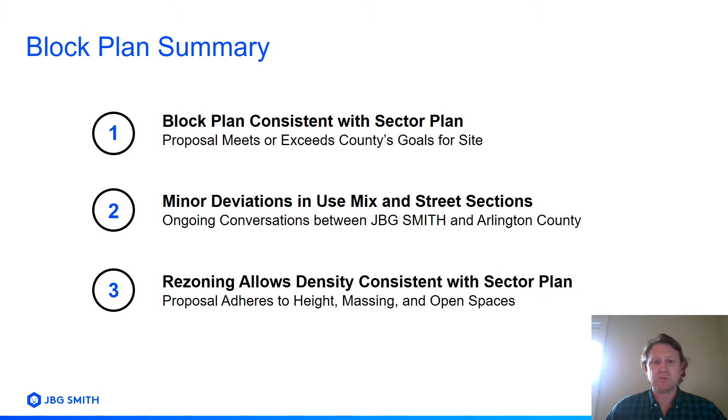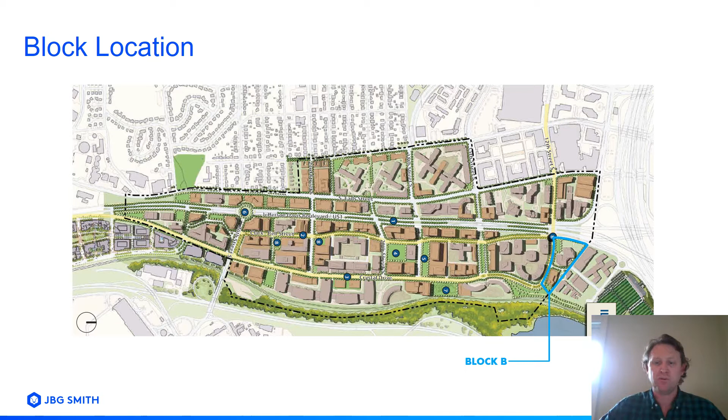For context, the subject site is located at the northern end of Crystal City and is bounded here in blue. The site is currently improved with an existing office building on the western portion, which JBG Smith also owns, and a passive green space on the eastern portion, which was indicated in the sector plan to be a potential development site.

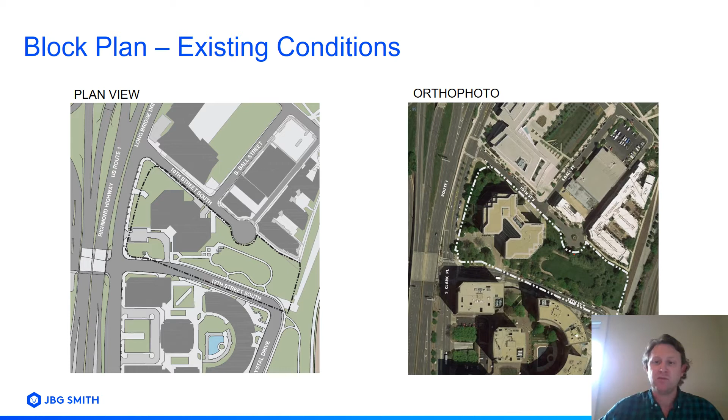This snip from the sector plan shows that the subject site, highlighted in light blue, be limited to 110 feet in building height.

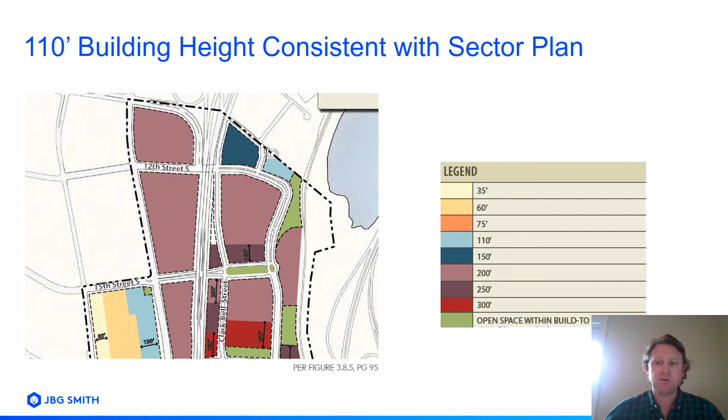This snip, also from the Crystal City sector plan, shows that the base density for the block, once rezoned to C-O Crystal City, should be 1.5 FAR.

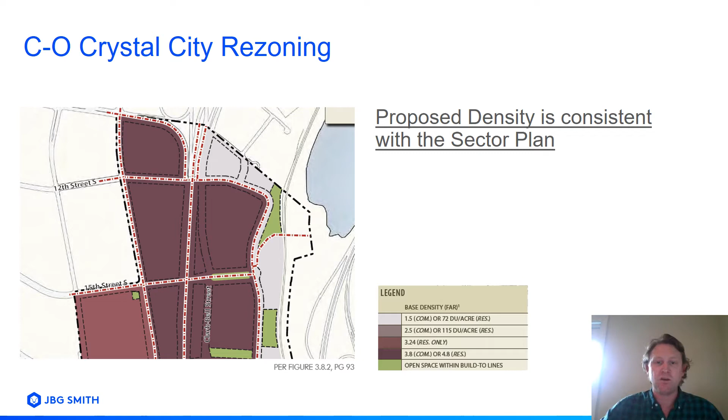The sector plan also included guidance that a potential development on the site should include an architectural feature along the eastern facade in order to mark the intersection between Long Bridge Park and Crystal Drive.

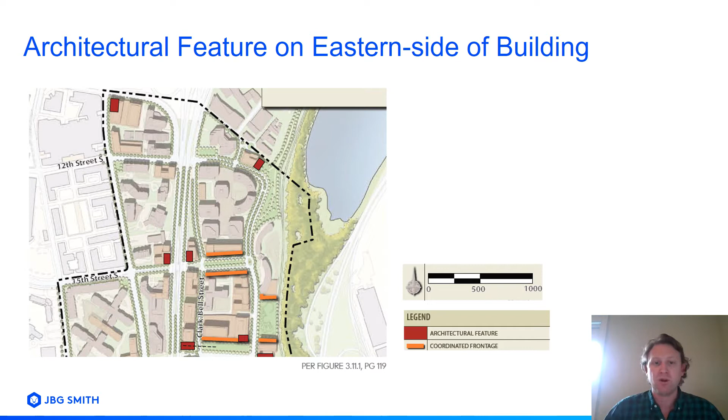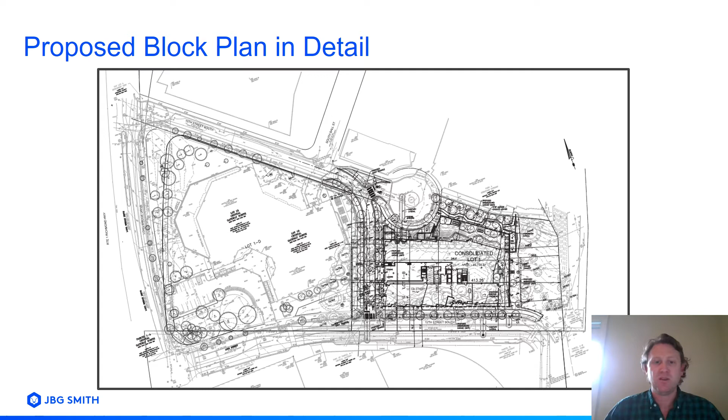This shows the detail around the proposed block plan, with the eastern portion showing the improvements from the new 101 12th Street project and the western portion showing the existing 201 12th Street office building.

In terms of density, the application includes a total GFA of 561,094 square feet, which is consistent with the PDSP for Crystal City that was approved by the County Board back in March.

As part of the PDSP, we agreed to provide a series of community benefits centered around open space dedications and infrastructure improvements, in order to achieve the bonus density required to support the application.

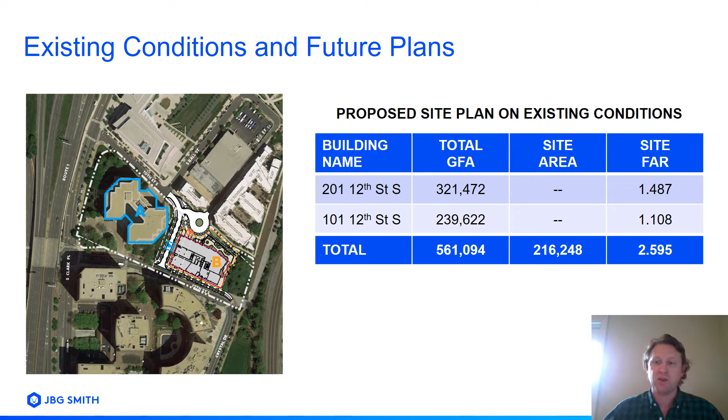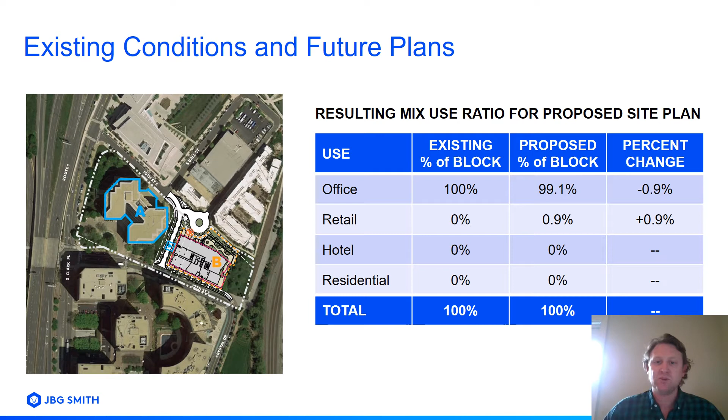This shows the resulting mix ratio from our proposed application. You can see that the site will be predominantly office, with a small amount of ground floor retail located within the new 101 12th Street project. Note that this is a deviation from the sector plan, which envisioned a balance between office and residential on the site.

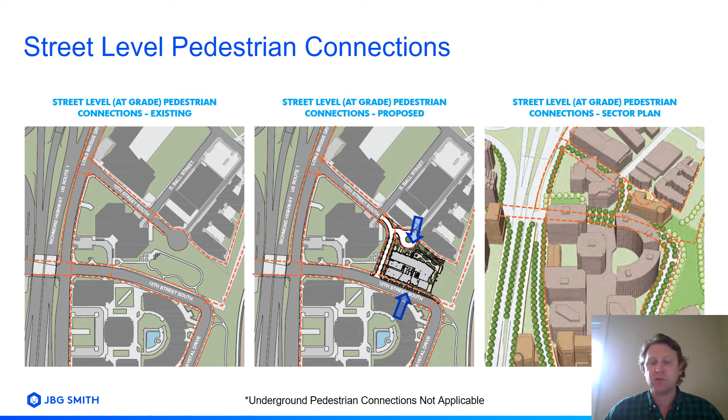In terms of street level connections, the application is consistent with guidance from the sector plan, showing a new roadway connecting 10th and 12th Street to provide enhanced pedestrian and bicycle circulation. Additionally, the project has an opportunity to create enhanced connections from the existing cul-de-sac going up towards Crystal Drive and Long Bridge Park, which we are currently exploring with county staff.

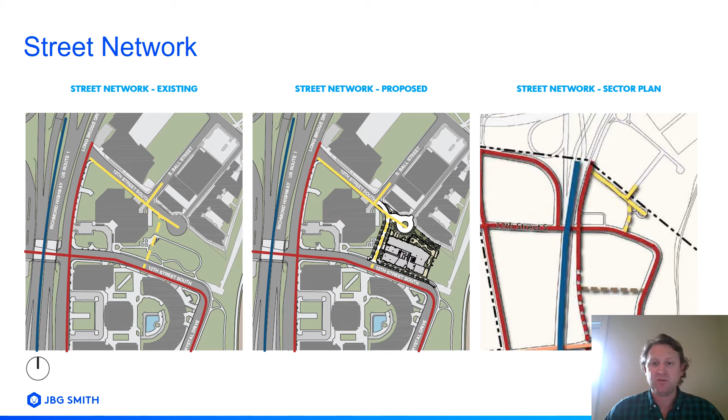As mentioned, the sector plan indicated the new roadway, or South Ball Street, be installed to connect 12th to 10th Street. This new roadway will provide redundancy to the master transportation network and increase permeability through the site for vehicles, pedestrians, and bicycles.

We very much look forward to working with staff and the community to understand how we can best come up with a cohesive design for how our improvements will coincide with the potential park programming that will be determined through a staff-led effort with the community.

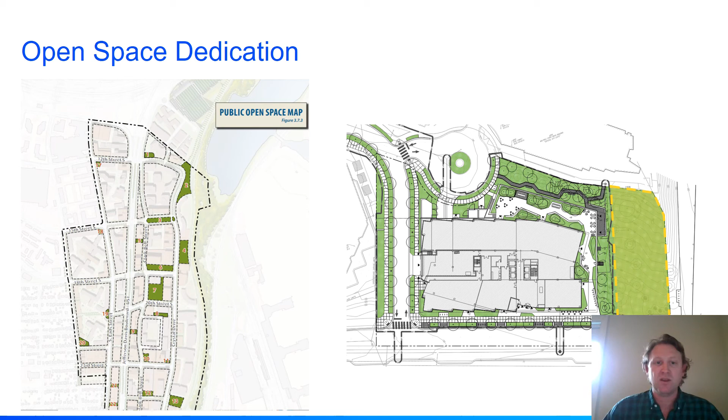In summary, the block plan is generally compliant with guidance from the sector plan when it comes to building height, density, massing, and coverage. There are a handful of minor deviations: one being the use mix, two being the street sections, and three being a parking reduction. However, I would note that none of these are inconsistent with other applications that have been recently approved.

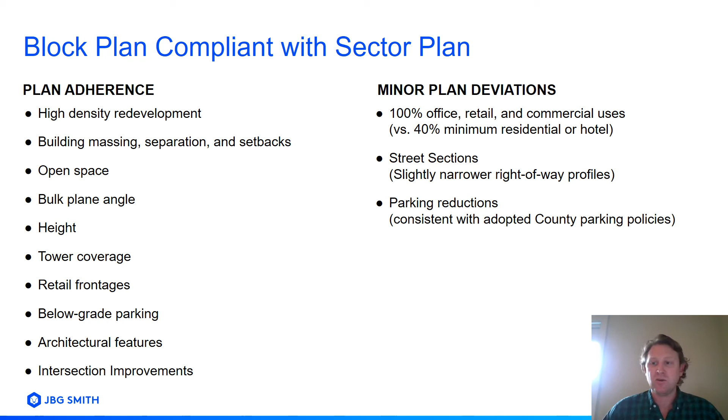While our proposal exceeds sector plan goals through a variety of aspects, there are three that I specifically wanted to highlight: the establishment of permanent public open space, the introduction of infrastructure improvements to provide increased permeability for bikes, vehicles, and pedestrians, and the advancement of the vibrant mixed-use environment outlined and described in the sector plan.